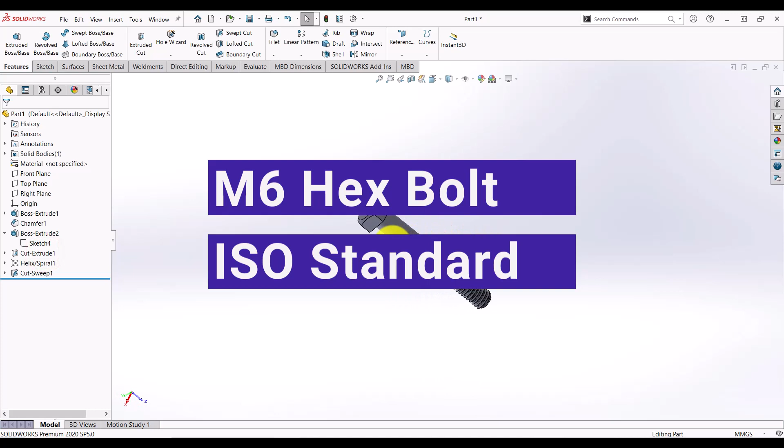In this video we're going to show you how to make this bolt. This is an M6 ISO standard hex bolt, and we're going to make it in Solidworks. Let's start: go to File, New Part, and click OK.

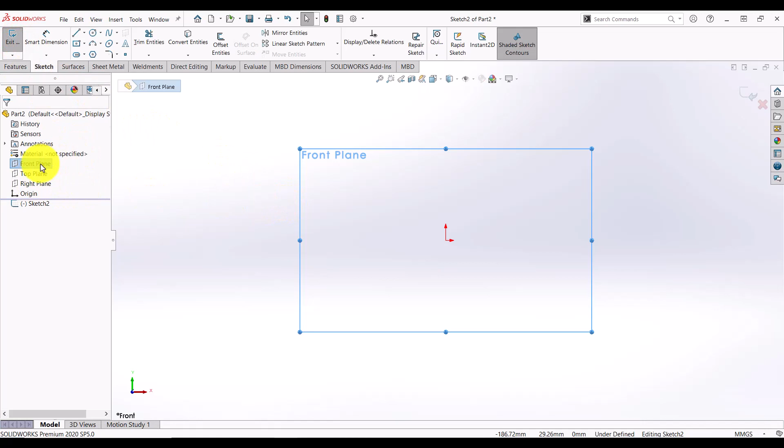We'll start off by selecting the front plane and starting a new sketch. It's in millimeters, since we're working in ISO, we want to use millimeters as our base dimensions. Start the sketch on the front plane, select this circle, escape, and smart dimension the circle at 6 millimeters.

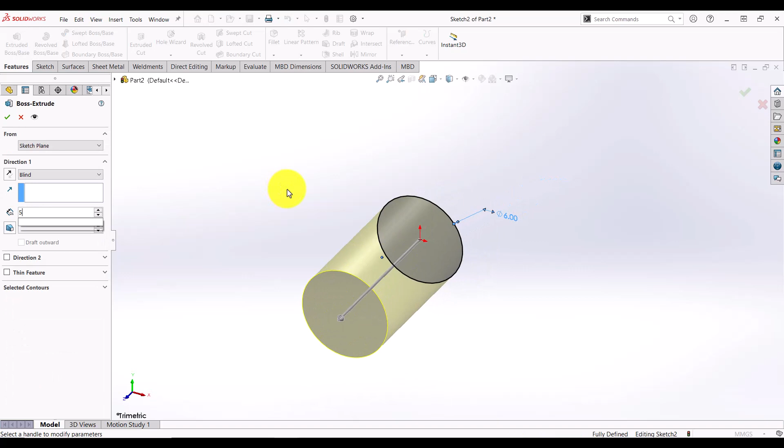Go to Features, Extrude, and we're going to extrude it at 50 millimeters. You can change the length of the bolt as per your requirements. What I'm making is 3D print compatible, so we want to make it very nicely.

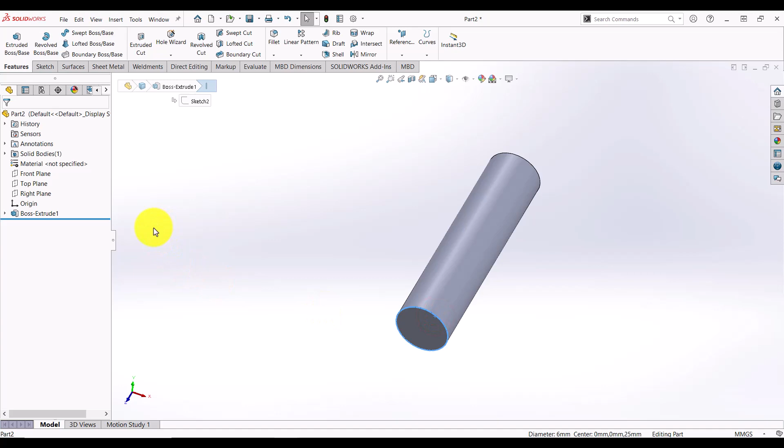We're going to select one side, and under this fillet you will find this chamfer. We're going to chamfer it at 1 millimeter and 45 degrees.

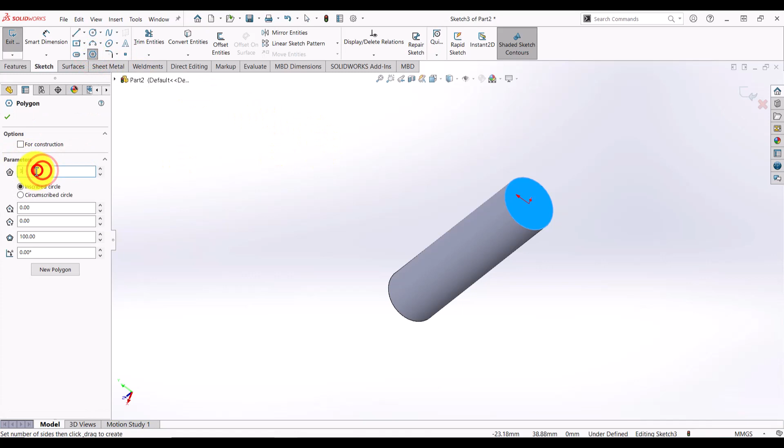Now select this side, start a new sketch, and sketch a 6-sided polygon. You can change the number of polygons to change the sides. Always remember to fully define your sketches. Now we're going to smart dimension it at 10 millimeters.

We're going to select these two and give it a rotation. Wait, it's not working. You can always escape and fully define the sketch from here - select all entities in sketch - and this is the side.

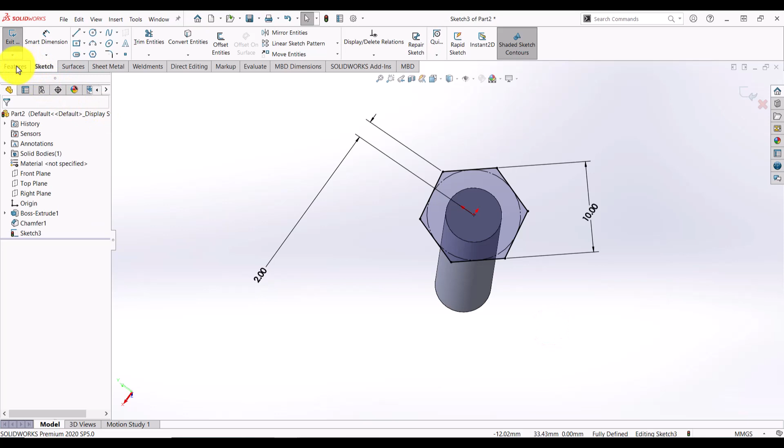I'm going to 2 millimeters, give it a rotation, and we're going to extrude it at 4 millimeters.

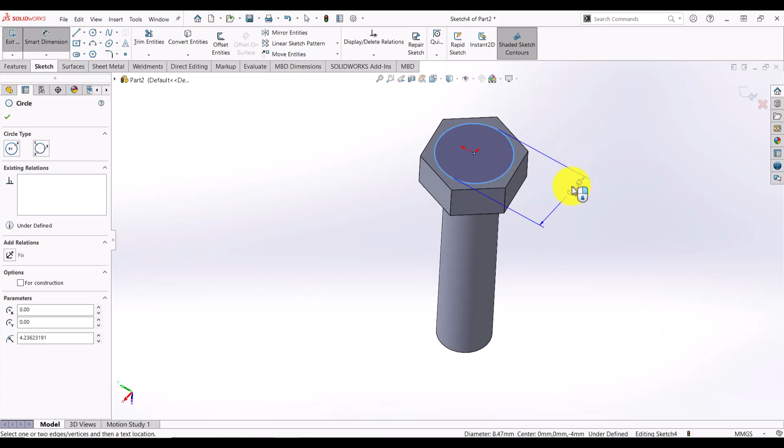Select the top and start a new sketch. Go to circle, and dimension the circle at around 8 millimeters.

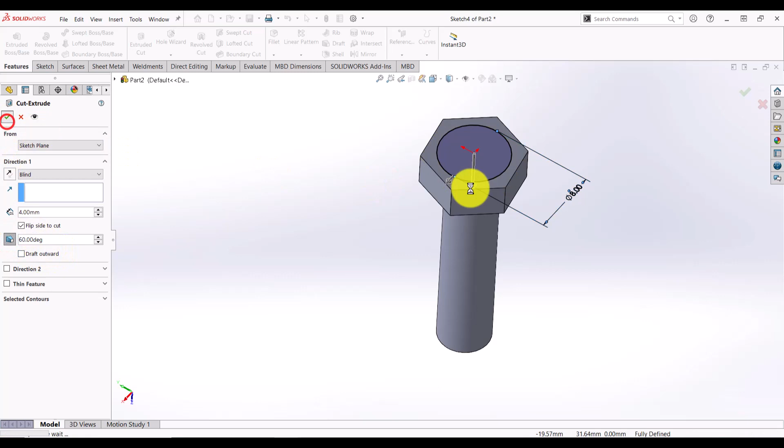Go to Features, Extruded Cut, check this box and draft it at 60 degrees. This is going to give you the appearance of a hex on the top.

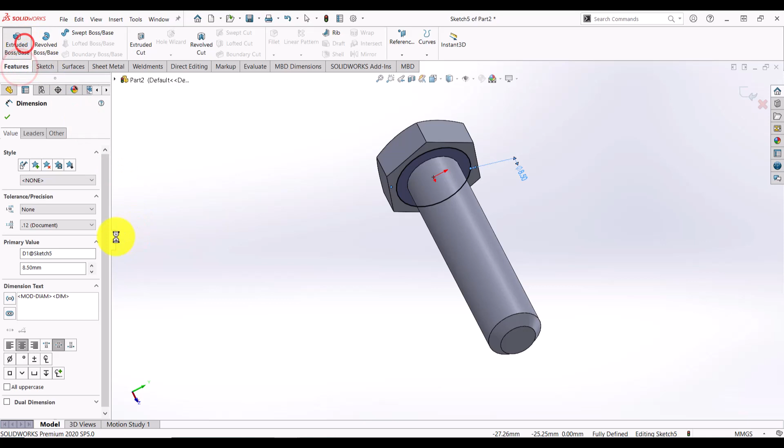Now select this bottom sketch and make a circle. It's going to be an approximate circle, I'm going to dimension it at around 8.5, and we're going to extrude it at 0.2 millimeters.

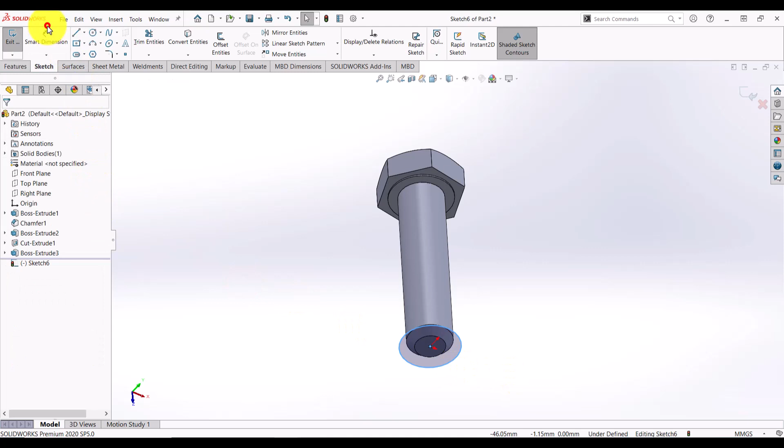Now the thing that I've talked about before, it's very simple - just sketch on this bottom plane and make a circle. Smart dimension the circle at 6 millimeters. Alternatively, you can also use convert entities like I've talked about earlier.

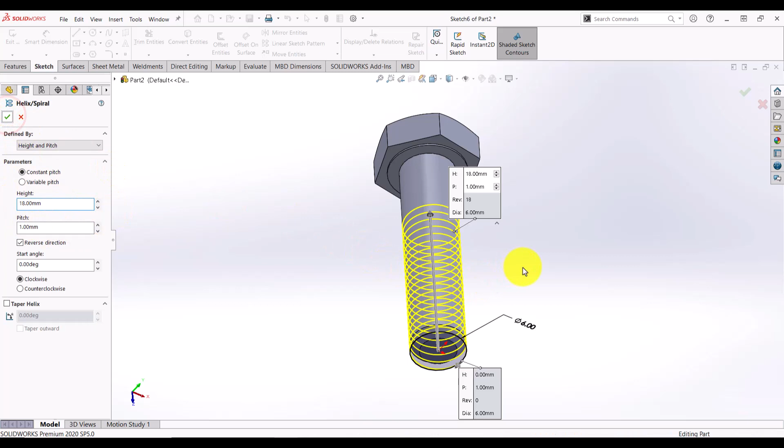Go to Insert, Curve, Helix and Spiral, and make sure you're selecting height and pitch. We're going to select 18 and 1 millimeter as our pitch. This is the path.

Now we're going to go to the top plane, hold down control and use the arrow keys to adjust it as you like.

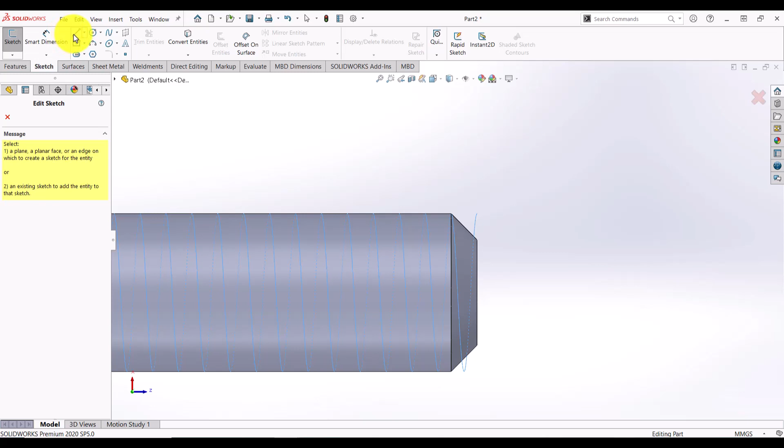Now we're going to make a line. Sketching in the top plane - let me just select this. On the center, just make a center line.

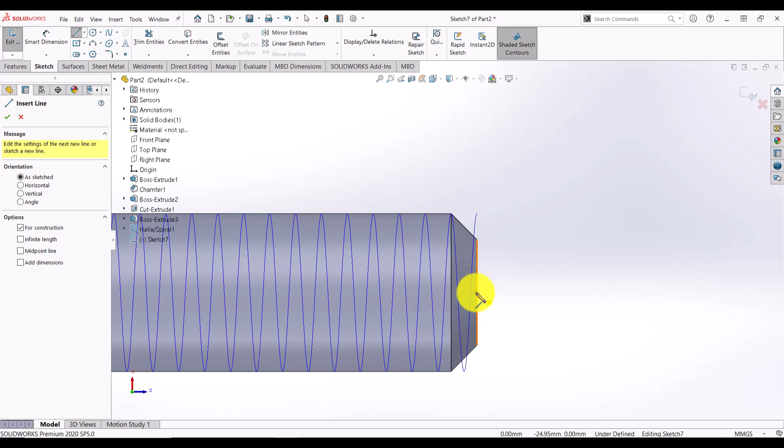Now we'll go to polygons and make a three-sided polygon. Make sure to check for construction. Escape.

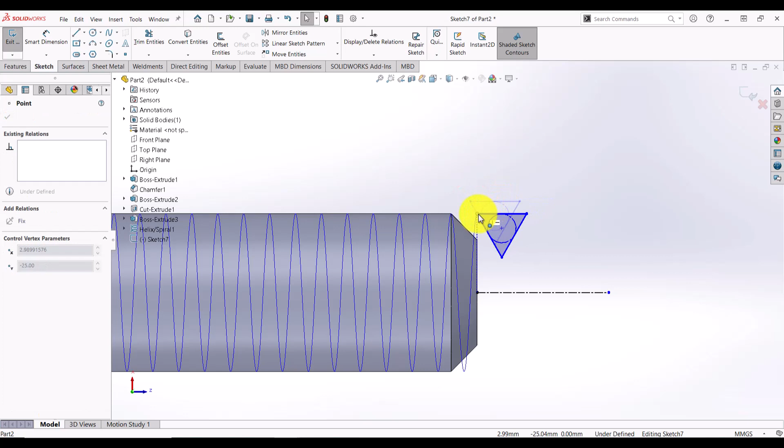We're going to connect it with this. The top of the polygon is the pitch, which in our case is 1, and its height is 3 millimeters.

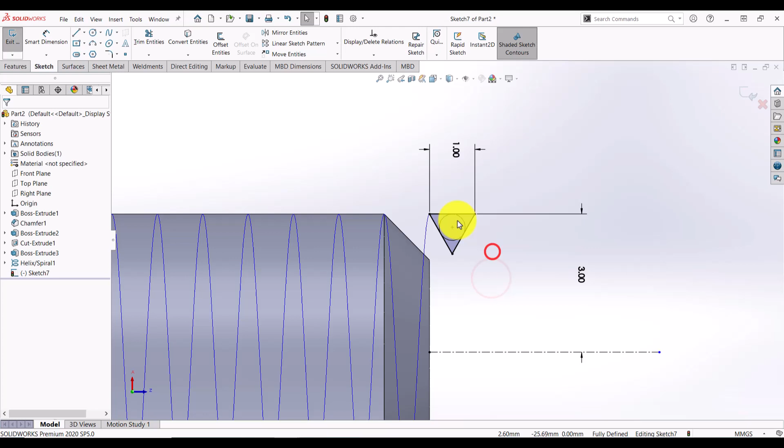Escape, and we're going to connect it with this path. Control select and construction geometry. Now we're going to draw a center line from here to here, and another one from here to here.

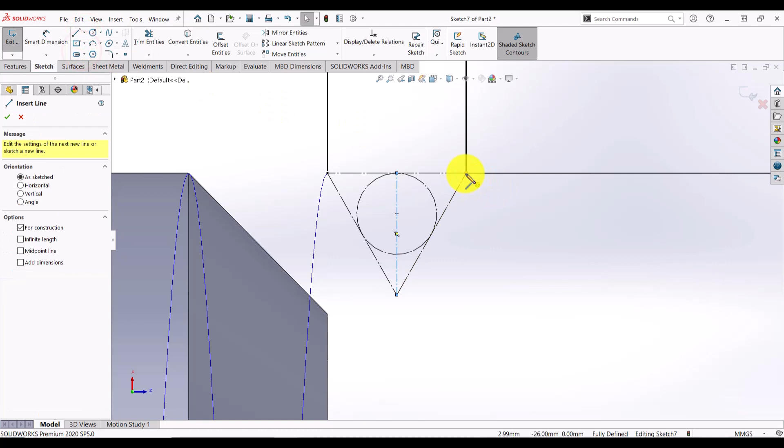Now draw a line connecting to these 2 points, and the dimension for these would be 1. This is 1/4 of your pitch, so that's 0.25.

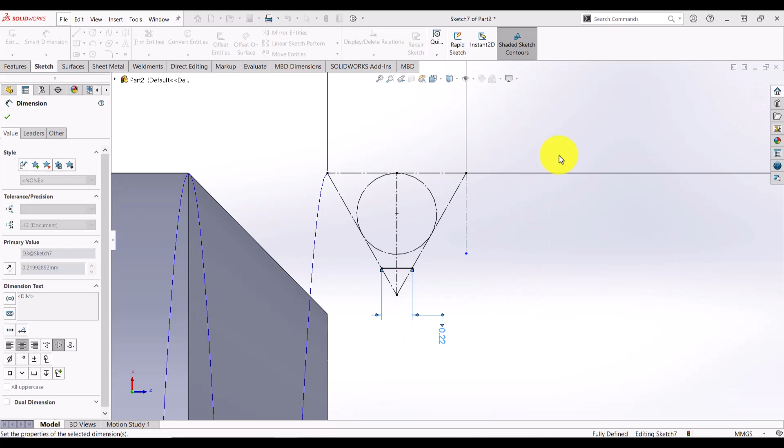And another line here - actually make it a midpoint, and make sure it's connected to those. Select this point and this line and make it coincident. Now we're going to dimension this at 1/8 of your pitch, which in our case is 0.125.

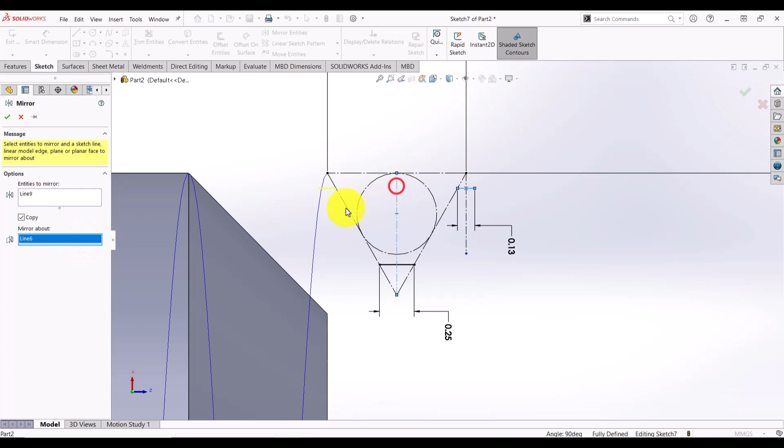Now use mirror entities, mirror about this center line. Now we're going to control select the 3 and make them construction geometry.

Now we're going to go to 3-point arc, select these 2 points, and select this arc. Select the side and make it tangential.

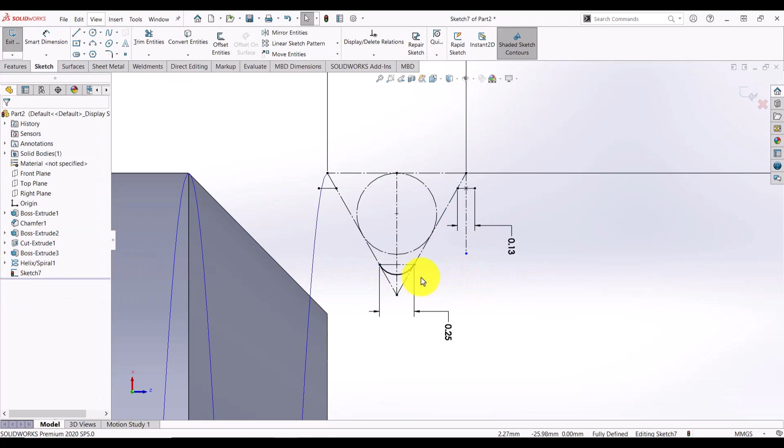Now we're going to select this line and just make a path using our construction geometry. Should be pretty easy from this point on.

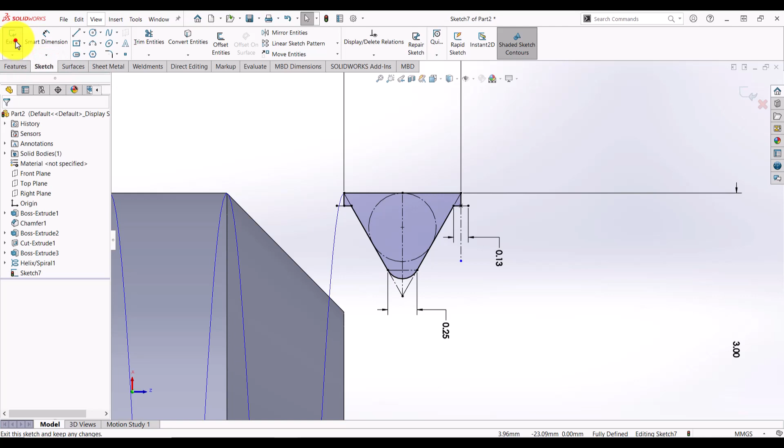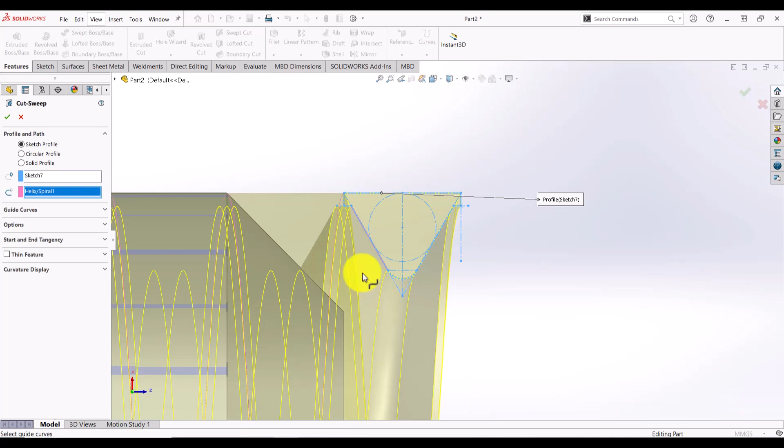Now we have our closed sketch. We can go to Features and Swept Cut - actually you have to exit the sketch for this one. Go to Features and use the Swept Cut. We're going to select this as our profile and select the helix and spiral as our path. It's going to generate a preview for you, and you can select OK.

So this is our bolt, so you can hide this helix and spiral. The last thing you need to do - notice that this side is odd.

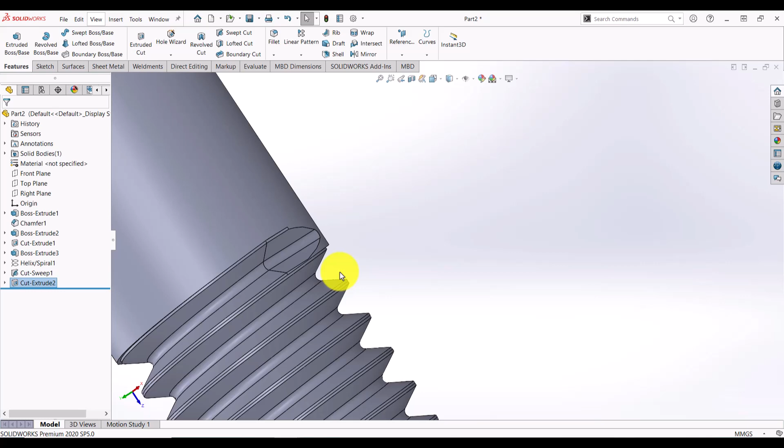So we're going to select this side, get a new sketch, use Convert Entities, and it's going to make a profile. Now just use Extrude Cut and select Through All, and that's the bolt for you.

This is an M6 bolt, and you can give it an appearance for metal, and you can make it chrome, and that's it. You can now render it or 3D print it by converting into an STL file.